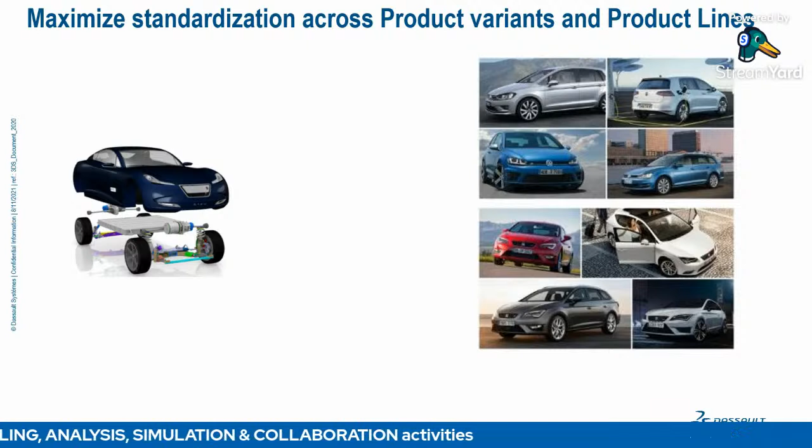So the main focus for today is how we can maximize our profit. Maximizing our profit as a product maker, doesn't matter if it's in automobile industries, high tech industries, or even oil and gas industries. We want to maximize the standardization across our product variants or product lines, so that whenever a new product comes out, less variability happens and we can maintain our quality, and at the same time maximize our profit.

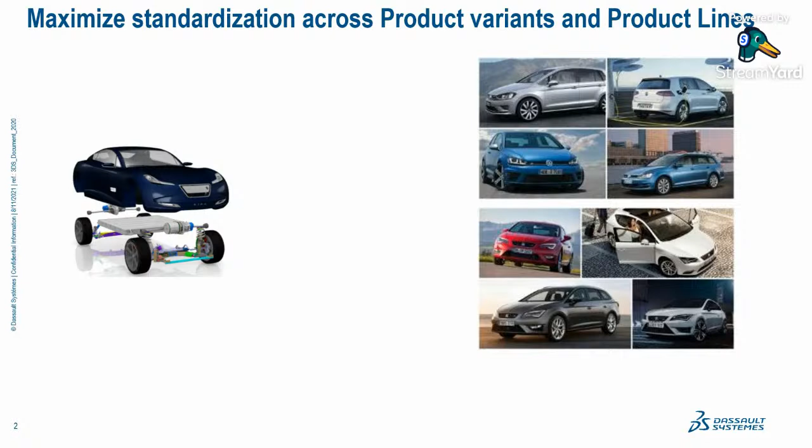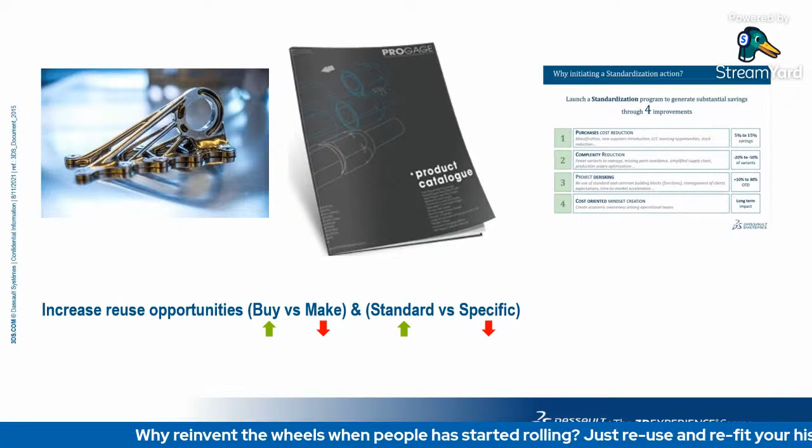So if we talk about standardization, there are four substantial savings we can have by using standardization: we can reduce our purchase cost, reduce product complexity, and reduce the project risk. And all our product design decisions are based on a cost-oriented approach. So how the 3D Experience helps is that it helps the company or organization decide whether they want to buy, make, or use a standard part, or create a new specific part for each product.

So here are three main components that I want to talk about today, about how 3D Experience can help: the reuse of standard components, and template management.

Component preparation and standardization: we want to design components against company good practice. We want to source the component from the value network. We are talking here about standard parts like screws, bolts, nuts, standard motors, and all that.

Then we go to component classification, management and optimization. Here we manage the company's ontology with required taxonomies to serve all stakeholders, and audit and monitor classified content to improve our component quality and relevancy. So here we are creating a classification system to manage our library and catalog so that it's easier to use for the whole company.

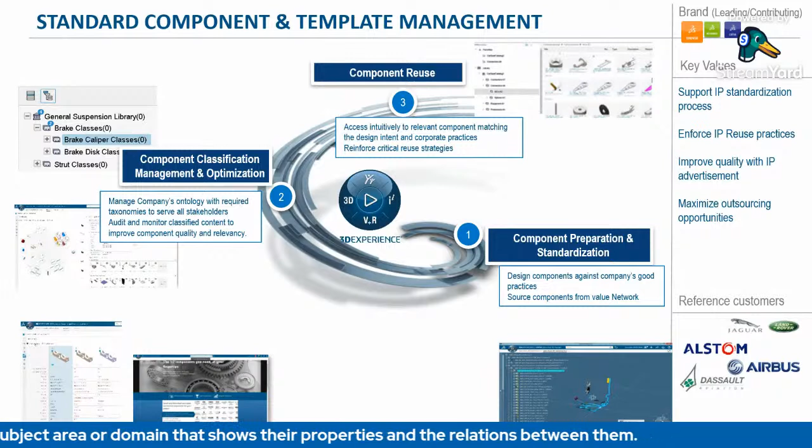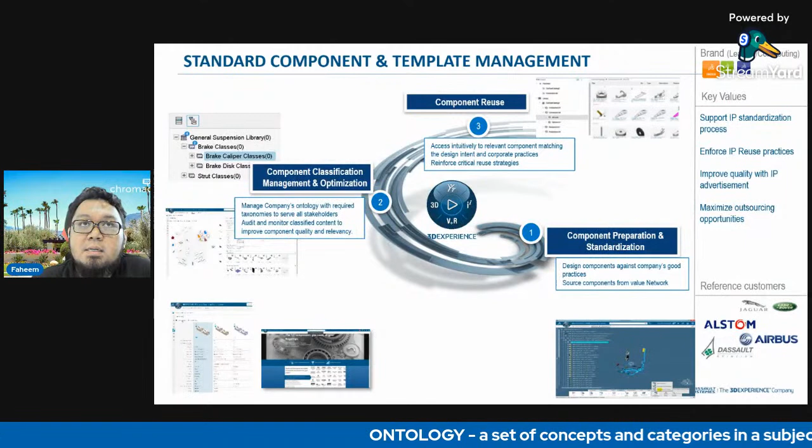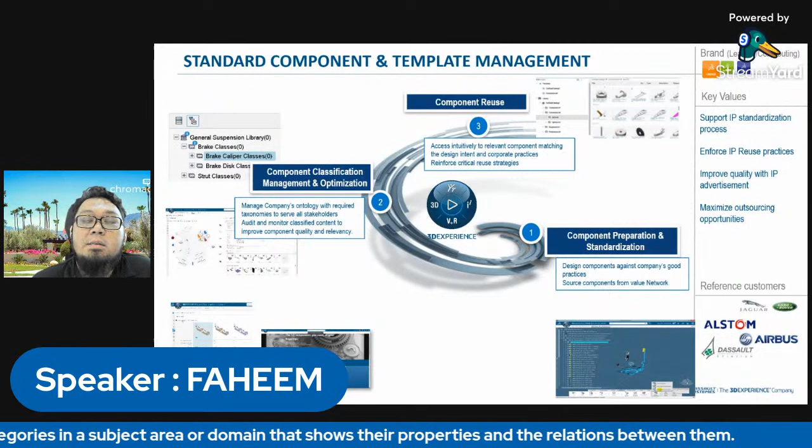And then finally, component reuse. Here we want to access intuitively relevant components matching the design intent and corporate practice. We are talking about specific parts that we can reuse from previous designs or products which are the best match, so we can reduce the cost of R&D, or reduce the cost of production by identifying which suppliers are good for these particular parts.

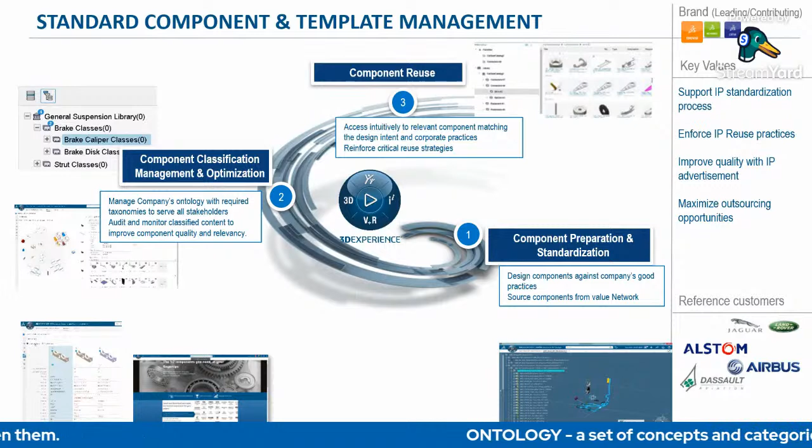So let's go to the first one, the component preparation and standardization. I will play a short video, just a brief video on what is a part supply.

For 3D sourcing, we have two base places in 3D Experience. There's a 3D Experience marketplace where we can source for a supplier. It has over 1,000 suppliers around the world. We can source for standard parts, and I think over 40 million parts are available.

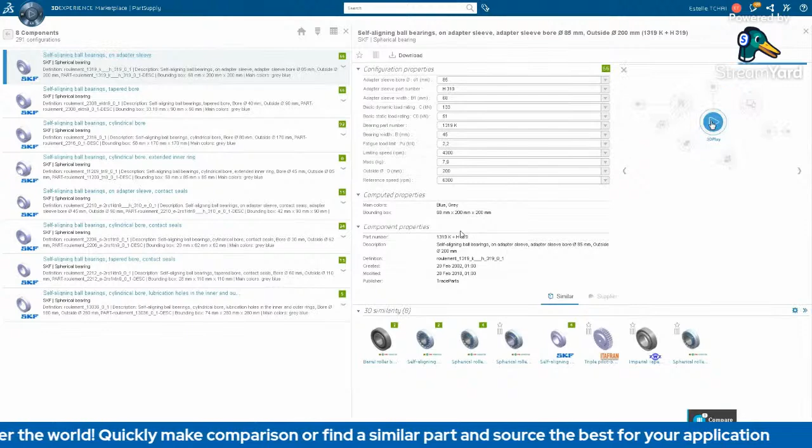So we can have a tag here. We can tag by certain product, or we can tag by a supplier category, what kind of category. Here we can see the 3D part, the specification, the stress part, the functional part, or the mechanical properties, or even the drawings of these. And we can even make a comparison of what's available.

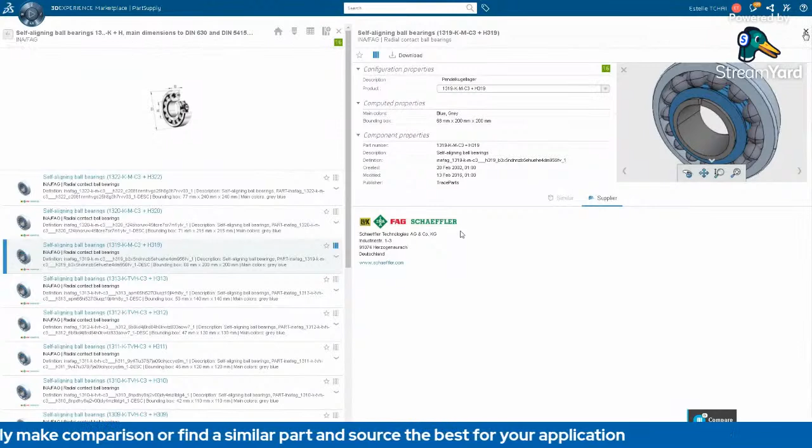This is a comparison of different suppliers of a standard part. For example, here is a bearing. We can see which supplier provides this and how much it costs. So here also we can see that this particular bearing has a lot in common between the different suppliers.

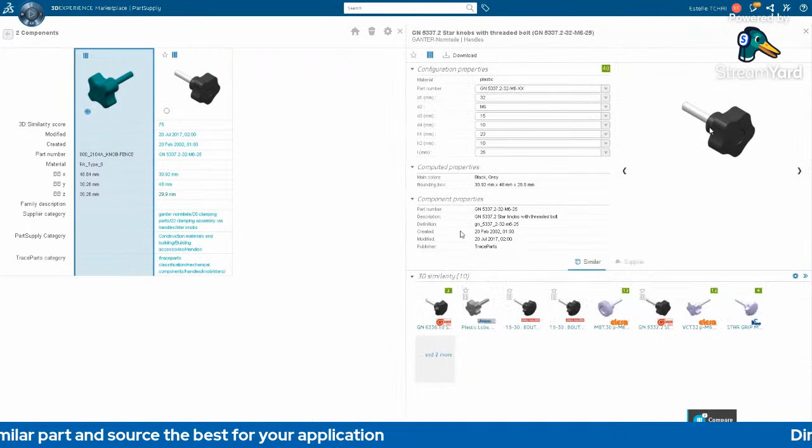We can test our file here. This is from Catia. We want to look for any part with similar geometry. We can insert our geometry into the experience, our part, and it will search for standard parts that have a similar geometry. For example, this particular knob has a few similar suppliers with 3D similarity.

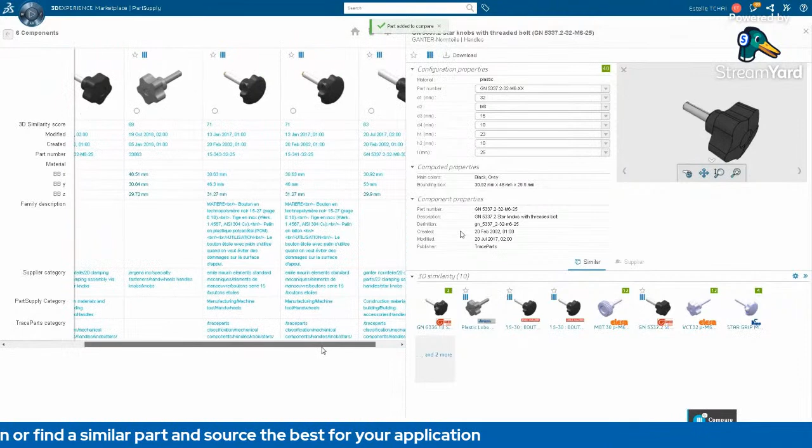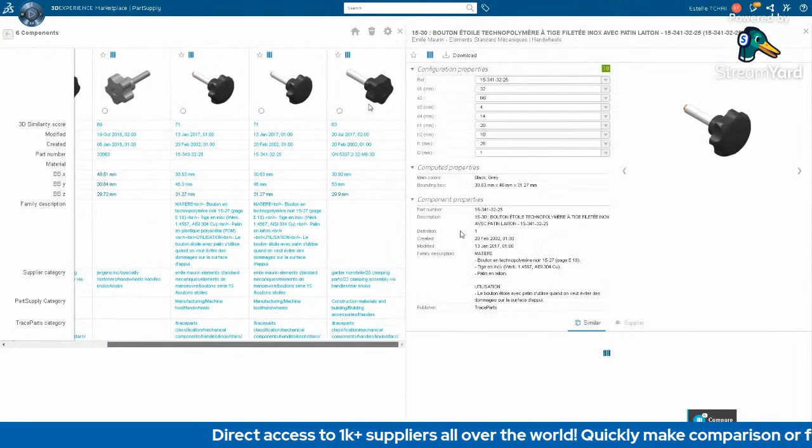In this case, if we don't have any particular search word, we can even use a 3D part. So 3D Experience will look for the similarity in the 3D itself. We can use Catia V5, step file, or SolidWorks. That's a brief introduction.

Basically, the 3D Experience marketplace connects between the designers and the sellers, the suppliers, industrial service providers. Even from the designer perspective, we start to connect between the designer and the supplier. We don't have to go through the whole process until purchasing and then go back to the designer, back and forth. Here we can connect directly all the designers, the design and manufacturing engineers, directly to the supplier.

You can explore this and create a free account on 3D Experience. Then you can open PartSupply at partsupply.3dexperience.3ds.com and make.3dexperience.3ds.com. The make one is for a 3D printing marketplace, so if you have anything to 3D print, you can source it all around the world. As mentioned before, we have over 1,000 content providers with over 40 million plus mechanical components.

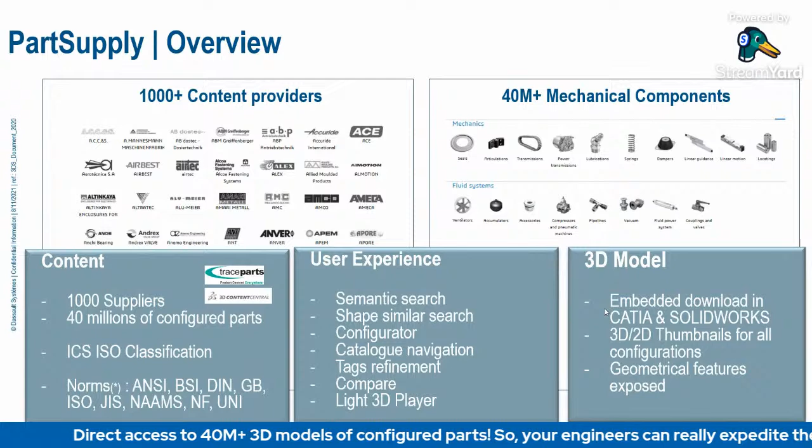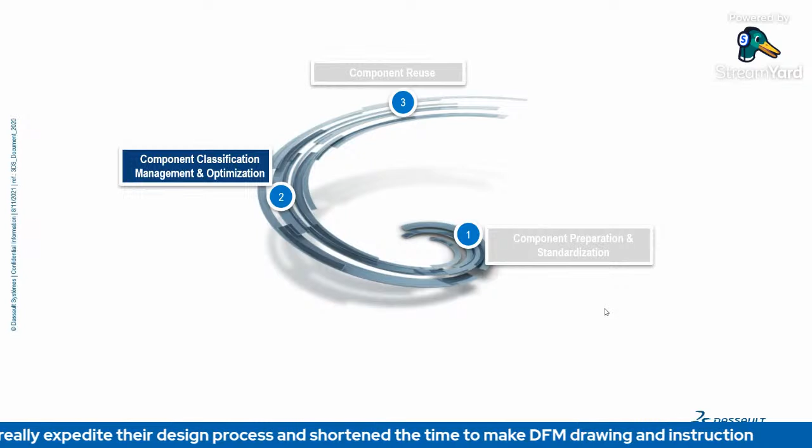Next, we will go to component classification, management, and optimization — basically how we can help manage your libraries, your company libraries, and ease the process of standardization and reuse by using 3D Experience. We'll look first at a short video.

As a classification manager, what we are trying to do is show how we can help create a library for a company, and how easily you can create your own classification, your own library, by using 3D Experience. The GUI already helps if we want to create subclasses, classes, or rectify, and even create classes based on a certain attribute.

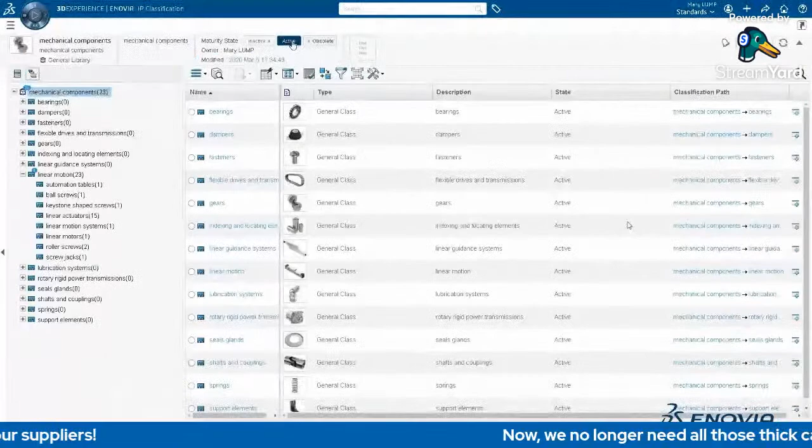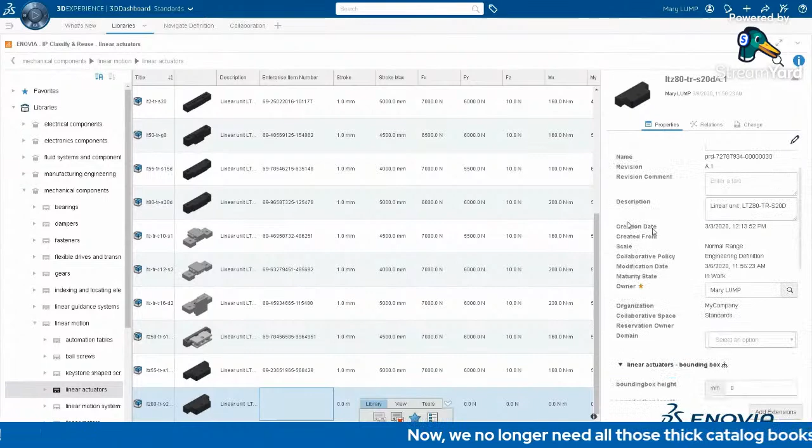Here we can create attributes that are very specialized in some parts, and this will help our designers easily find their products later in the design process. If we look here, everything has been classified accordingly, and we can specify each parameter so that it is easier for the designer to search for this part.

Here, as a designer, when he wants to find a particular part, he can navigate easily just using an attribute. Let's say FX over 6600, and all the parts that have that attribute can easily be found.

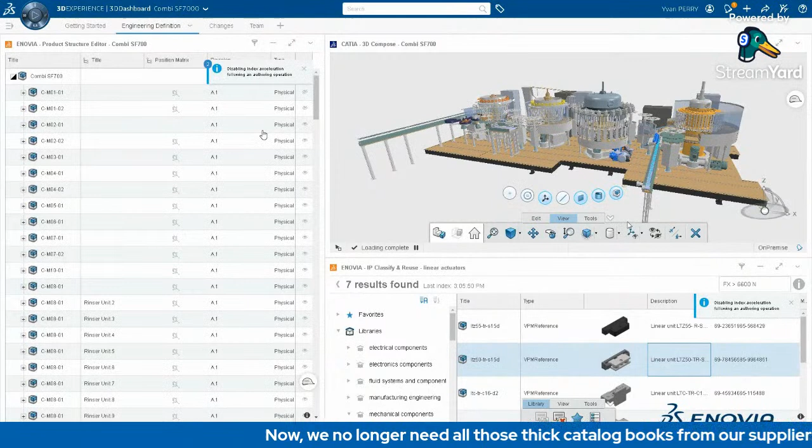In addition to attaching information to engineering data, other roles in the organization also require the ability to view product data through their own role-based classification. Most reuse catalogs have a single monolithic classification taxonomy that defines the organization of all product data, so all roles that need the data must access it through the same classification hierarchy. Usually this hierarchy is defined for the role that makes the most use of the data, typically the product design function. But to be effective, the product development process needs to share information efficiently across all disciplines.

Engineering, supplier management, marketing, legal, all related roles need to be able to collaborate and combine the resulting product information into a single source of truth.

So the classification organization that makes sense for the product design may not be intuitive for other roles. Marketing or a supply manager may not have a good sense of engineering classes and may not be able to easily browse through or search in this organization.

So in order to efficiently collaborate in the product definition process, in order to find and use material for their own task,

other groups require classification taxonomies and attributes that are specific for their roles. You would have a different classification for each role.

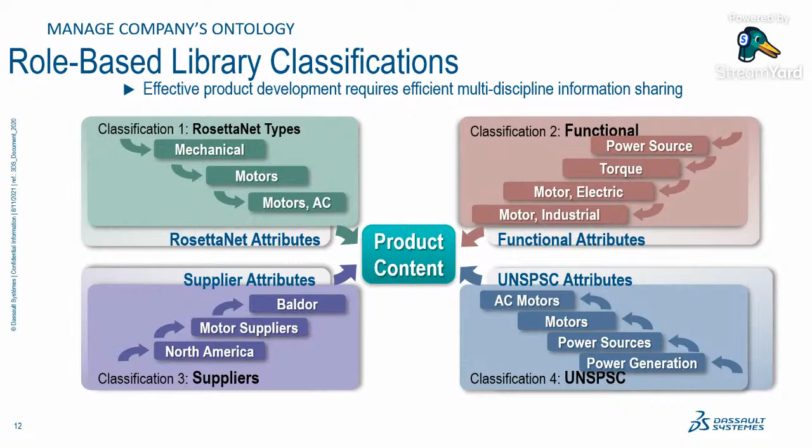So here, 3D Experience Library Central, we call it, provides a different approach. It provides the ability to have multiple classifications that simultaneously classify the same end items.

So each role can view the product data through its own library with its own classification. Each library has its own attributes that are inherited based on where the object is in the taxonomy.

Each taxonomy can be browsed and searched within its own role-specific definition.

So this makes it very easy for each role to find and use the data within a single source of truth.

So if there is a catalog in place, consider how the data in the catalog is organized. Some catalogs are simply a single large collection of reusable material.

Perhaps it is as simple as sorting by alphabetical order. So the simple catalog does not provide sufficient data to search for and identify a target component.

So frequently, one or more components would need to be retrieved and analyzed in order to make a reuse decision. Even in some cases, they need to be inserted into the design and tested in order to decide if it fits.

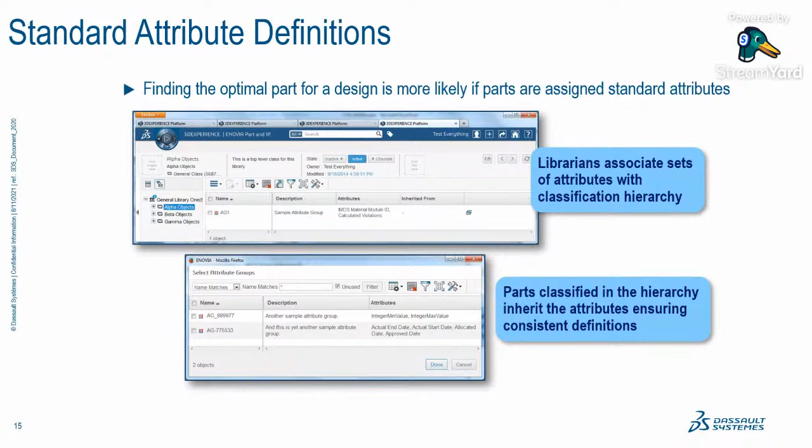Because the maintenance effort is low, the systems are flexible and easily defined. Here we can see the dynamic attributes directly on the classified item listing. So when an item like a part or document is classified under a class, it inherits attributes from the attribute group associated with that class. A user may view this inherited attribute in the classified item category listing.

Another topic I want to touch on is document retention. The retention and deletion of documents per prescribed corporate policy is a normal part of business. It impacts the cost of doing business by controlling the proper level of resources dedicated to storing business documents, and it affects the legal exposure presented by holding this information, including potentially damaging information or information that would exonerate a company.

A retention record object defines how long a document should be kept after it becomes obsolete. All the associated documents for that product also become obsolete. The retention record defines the length of time to keep a document before it can be purged. Purge does not mean delete the document; purging the record means the database can be purged, but the document can still be referenced as needed.

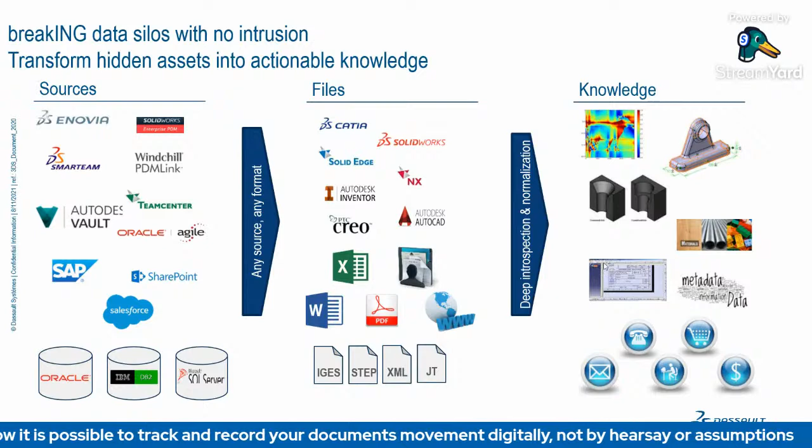The file type is not limited to 3D; it can be PDF, Word, website, IGES, STEP, XML, or JT. So it can be any type of file, and it can also be any kind of knowledge, whether analysis knowledge, metadata, a drawing, any range of knowledge.

And then finally we come to component reuse - how we can reuse our components. Here we have what's called OnePart reuse, which has three clear steps: we identify, we cluster, and we select. We identify similar parts based on 3D shape, geometrical features like holes, and semantic criteria.

It's all using AI and machine learning, and we can even classify the data depending on the role perspective, whether according to company policy, cost, assembly, or certain items. And then finally we select which one to publish to the engineering department.

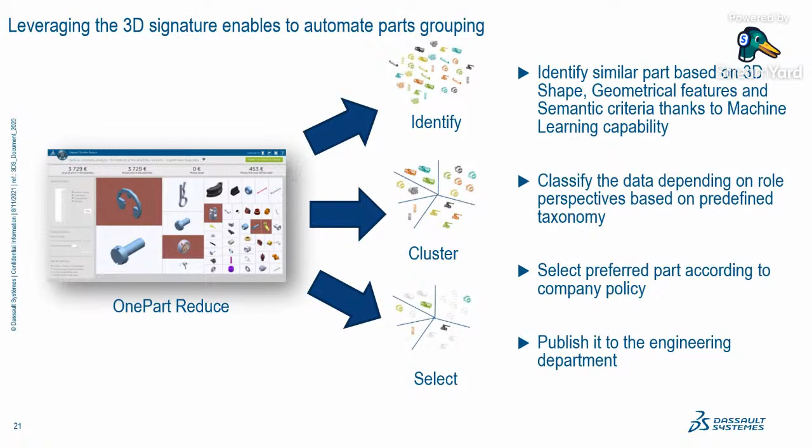So we use the company standardization strategy. The source for one part use can be from PDM, PLM, ERP, CRM, or any database like SAP or Oracle. Then we go and create one single source of truth, and from there we can analyze all information related to a single part and decide whether we want to reuse it or make a new one.

The advantage here is a one-click search. You can search based on shape, functional similarity, or things like holes and number of holes. So we can use the company's preferred parts, and we can also insert it directly into the session to see whether it fits or not.

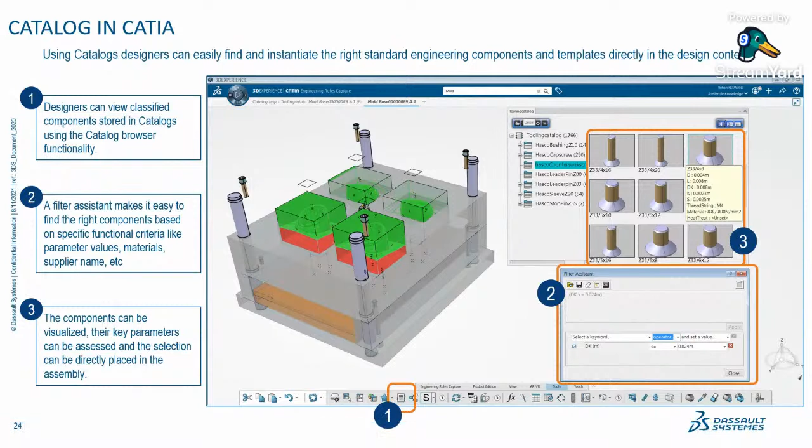Here as an example, this is the Catia catalog. Using the catalog, designers can easily find and use the right standard. The designer can view classified components stored in the catalog, then filter based on certain attributes or specifications, and the component can be visualized with its key parameters.

So for the last part, I will be showing a demo video for the reuse capability and the overall cycle for the reuse activity.

I'll play a demo video to show the whole cycle in the reuse activity. So here I am logging in as a part designer, and I'm doing a search and discover.

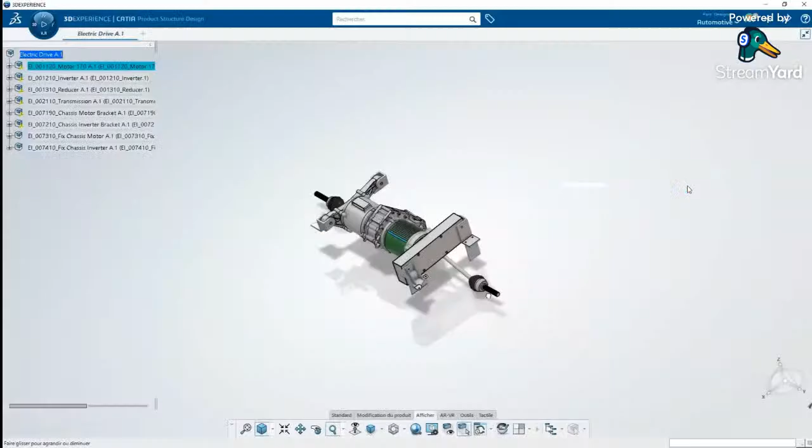Here in this particular electric drive, a motor electric drive, I have a general raw part - I just made a raw box with very specific holes, so we can see if I can find any similarity using what we call OnePart, which is the function of looking for similarity in the 3DEXPERIENCE. If I look through that, I can see some components that have a similar shape, but they're not relevant to me - it's just a box, any box we have in our library.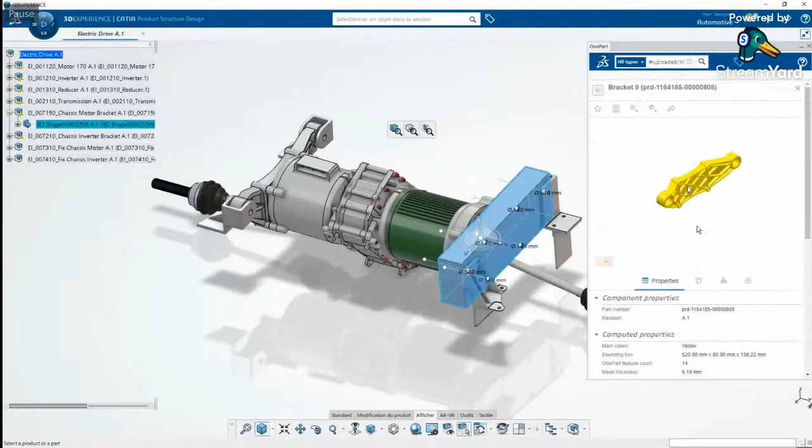But if we search based on particular geometrical features, like hole position and hole components, then we can see that there are some parts that are relevant to me for this design. So I can insert it and see directly in the session whether the part fits the product itself. And I can see that it fits.

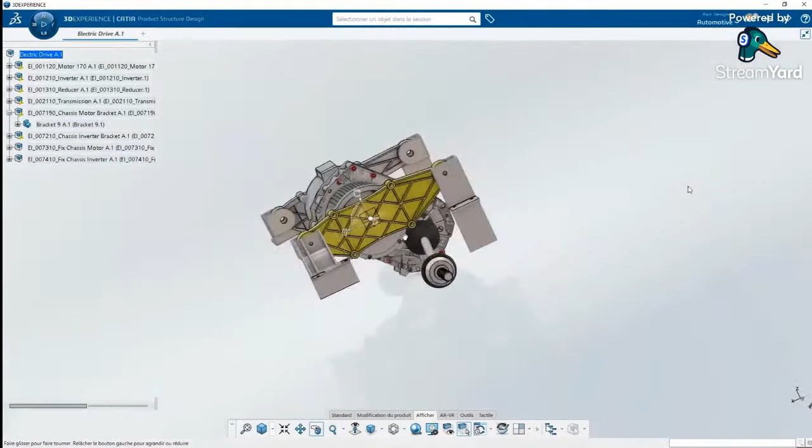So maybe I can use this part. But what makes it more powerful is we can use this - I open the 3D dashboard here, isolate one part, and from there I can open it and see a 360 view of this particular part.

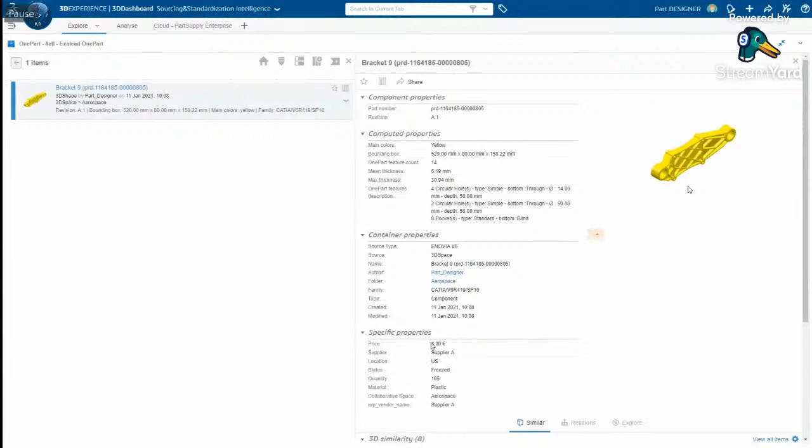I can even access the properties, the size, where it is used, and when it is used - even the ERP sources, the part price, the supplier, and the location, all in this 360 view.

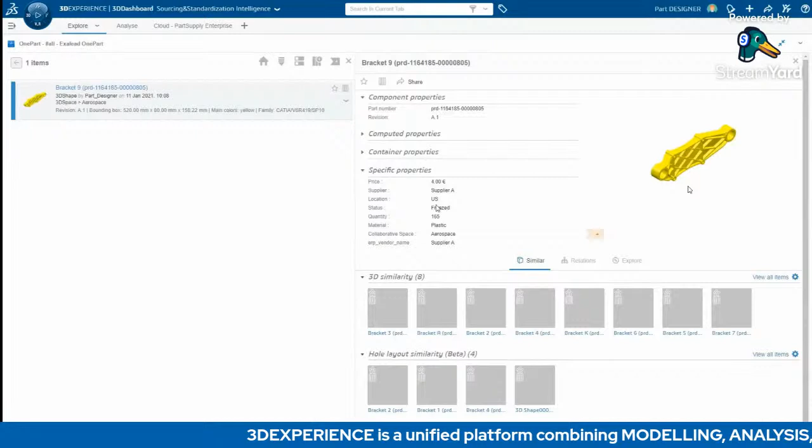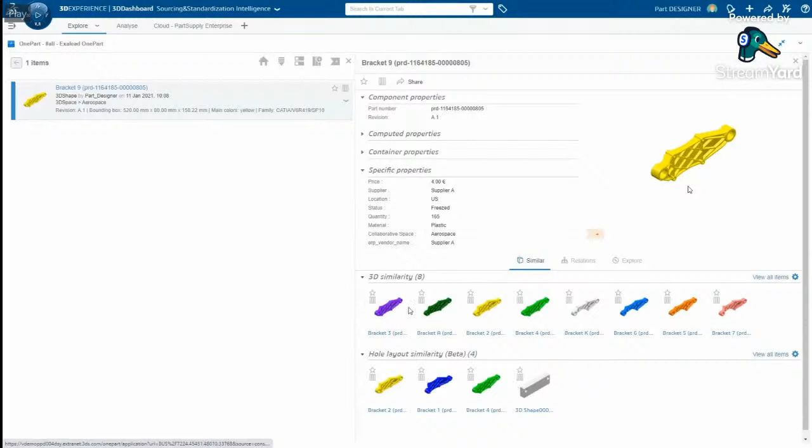So here also we can see some similarity and relation. What is the parent of this product? What are the related parts to this parent product? And also here we can see some parts with some 3D similarity and parts with similar hole layout. So we can use this criteria to search which component we need to use.

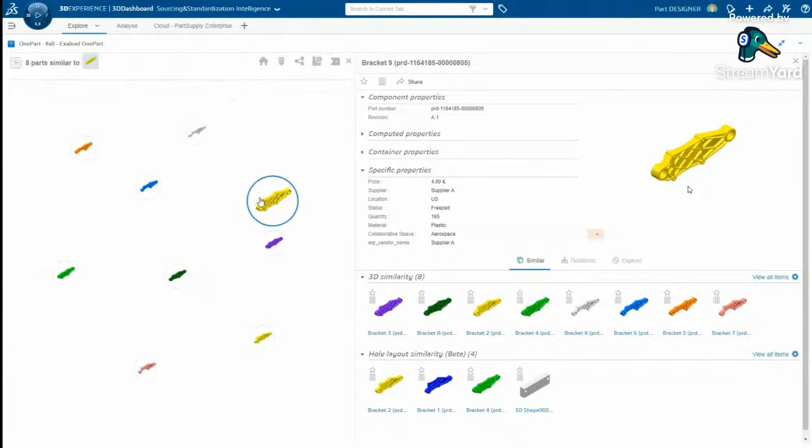And if I see all the items with 3D similarity here, I can look at it using a table view for easier understanding of the data, or even I can use a graphical view for a better feel of what is there in the database. And finally, I can compare all these parts that are similar. We can see in this comparison table which parts are similar and what is the advantage of certain parts compared to others.

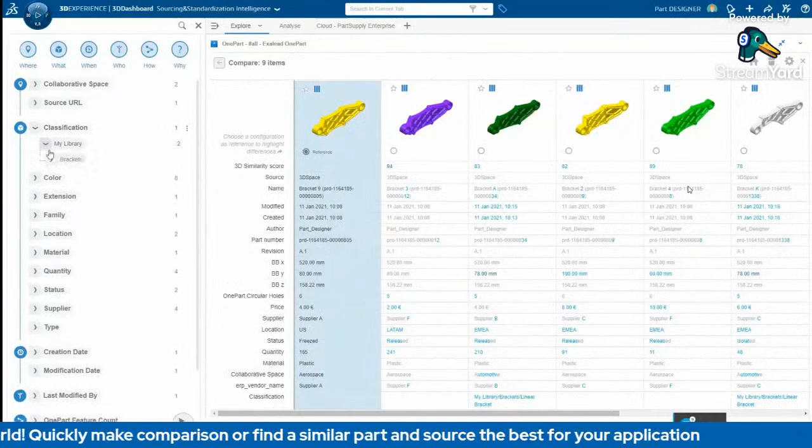But then when I look at the classification of this bracket 9, it is a linear bracket. But when I look at my IP classify and reuse ENOVIA app for a linear bracket here, I can see there are only two parts defined in the linear bracket. But the one I searched before, there are over like 7, 9, I think 10 parts here. So what I want to do here, I need to create a task for a standard part manager, because there are only two available.

So I want to ask him whether we can add all these parts into linear bracket. And now I am logging in as a standard part manager. We are going to do a cross-program standardization.

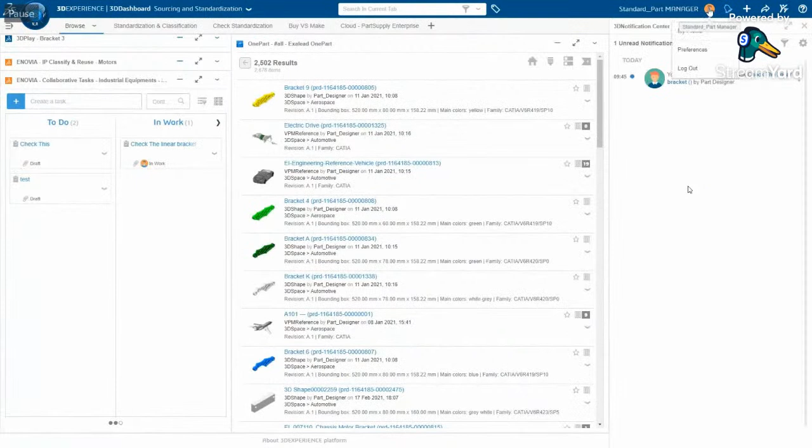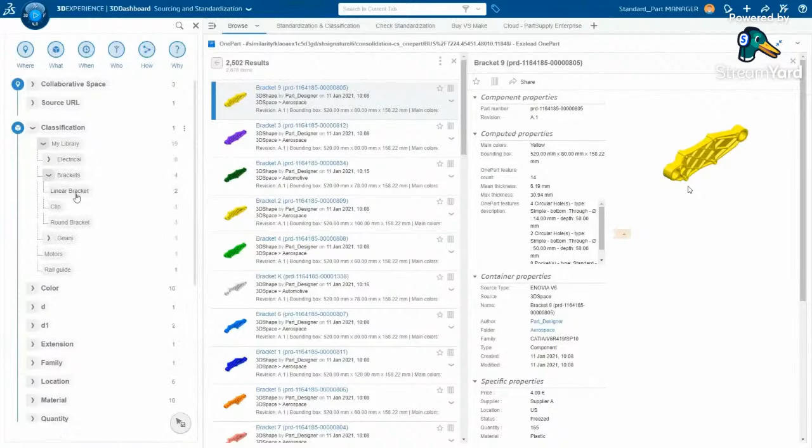I have just received a task. If you see previously, I received a task from a part designer, and then as a standard part manager, when I look at this task, I see the similarity also. It directly contextualizes what is similar, and when I look at the bracket in the linear bracket, yes, there are only two available, but I can see much more here.

So what I'm doing here is that I want to create a universe. When I create a universe, like a standard for civil universe, we define the scope, and then we can create the similarity ratio, like 20% here, and we want to go through my specific library, only search within my specific library.

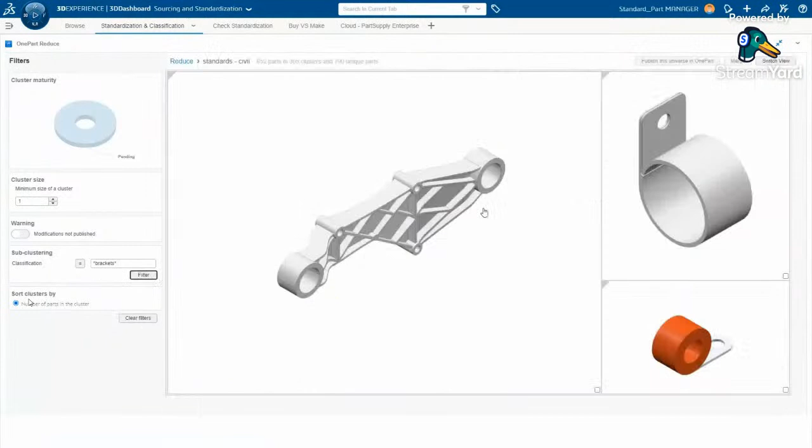So we have this many potential part standards, and if you see in the gray corner here, it is the part where it is relevant, and if I filter it by bracket, I can see there are 3 parts relevant to a bracket. So if I look at bracket here, I go to a linear bracket.

So I could see there are many parts that are similar, 7 you can see, and I can see this orange part here. This is in another similar cluster. So there is a cluster for that part, for the orange part, and there are 2 parts also in that cluster, in the pink part.

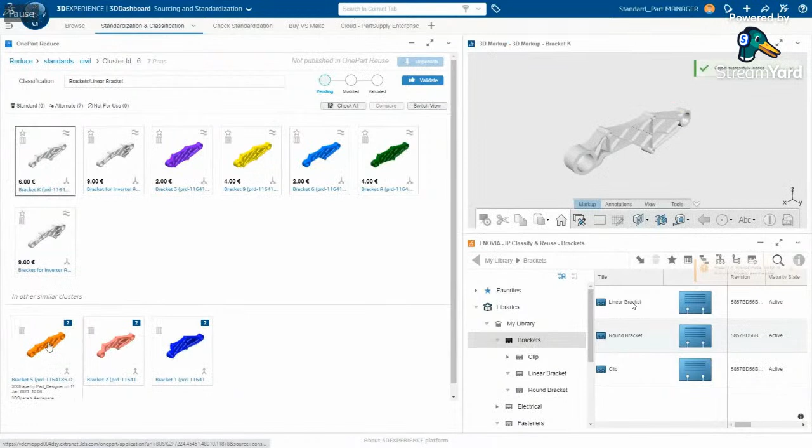So what I can do here, I can use a 3D markup to compare those parts in the different clusters, whether it is the same. So we can see here actually, so the hole position is correct, it is the same within, even though it is a different cluster, it is the same hole position, so it can be used.

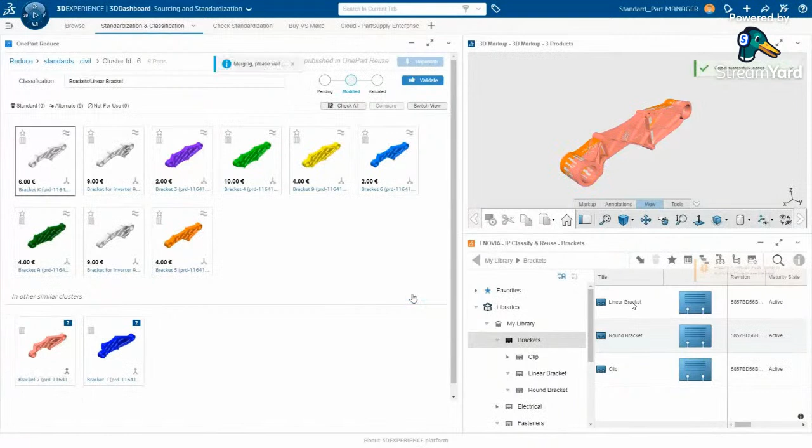And I'm checking this pink part here, whether it is the same, so I merge those clusters into one single cluster. So right now, if we go to my linear bracket, after I publish it, I can see that these two libraries here are helping to define which classification it needs to be, and then you can see the comparison. So we can see the numbers have grown up.

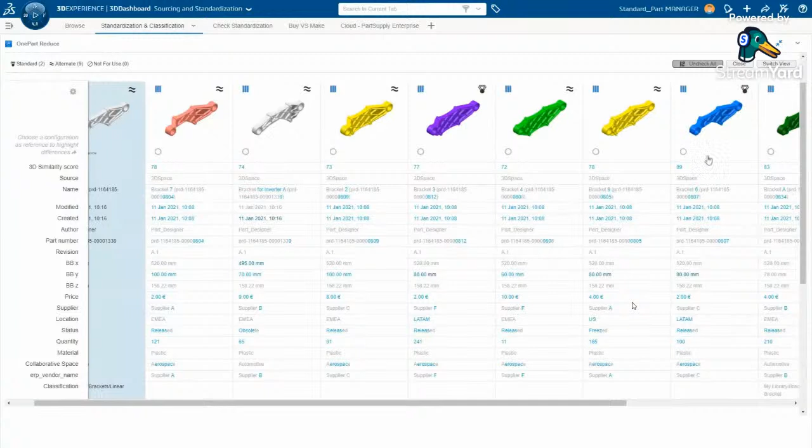So I'm selecting this basically based on which are cheaper. And let's say here I want to put something cheaper, and I also want to put something that should not be used. So here I'm selecting the pink part that should not be used for this particular project, for this particular universe, we call it.

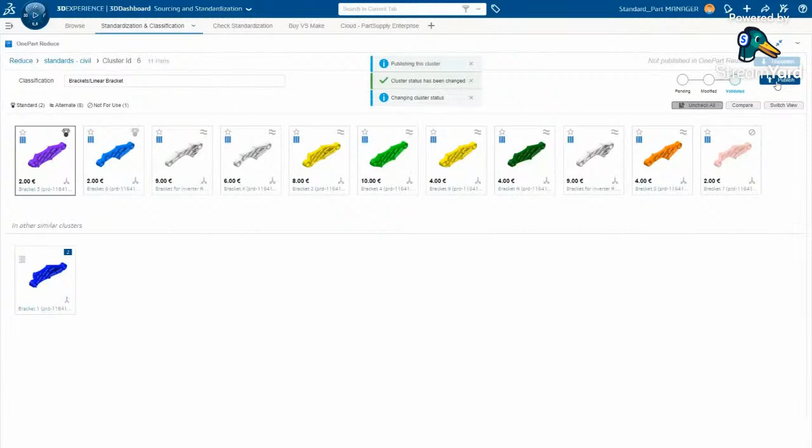So I publish this. So when I publish this, it is actually being published so that people can search it using a linear bracket. So if you see here right now, the linear bracket classification has more parts in it.

Next, what I want to do here is give an example. If I look into gear, I already know it is a gear. I just need to search for gears per classification. So I can see there are few similar items. Even here for this particular product, I can say not to use this particular product, but it doesn't even have any classification. And we just validate and publish it.

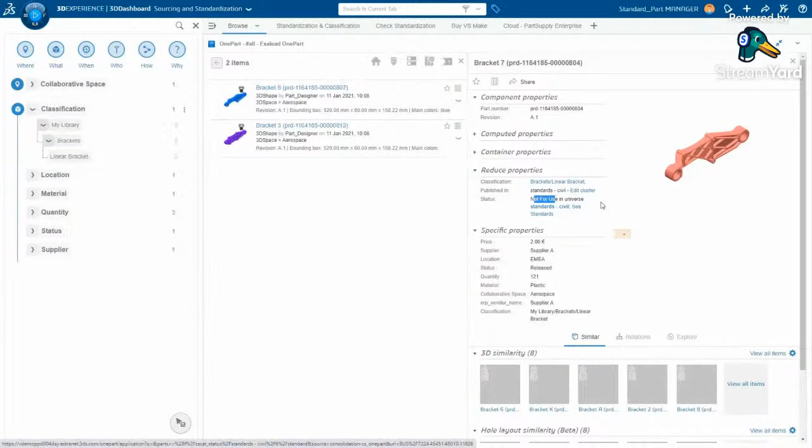Let's say in the military, we define the scope, and searching for any aerospace part, create the scope with a 5% similarity. And here we can see that it has these other two champion. But then I make this purple part not for use for this military universe.

So if you can see, in the universe for the standard, but not for use in the military. And then I make it as completed for that task.

So right now I'm still logging in as a standard part manager, but what I want to do is a standardization check on the assembly. So how will this part fit on an assembly? So I create another universe, but this one is specific for assembly analysis.

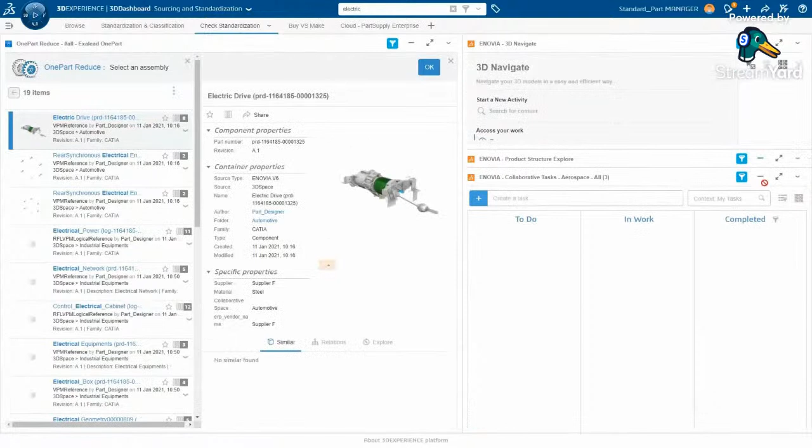So we want to do a check motor for civil program. We define the scope here. So we search for this electric drive, our electric drive. And we look through all the parts available here in the assembly.

And we can see parts here that are available for the assembly. So we select from our standard civil, from what we have defined before. And we run.

And we check there is 45 parts in the assembly. And there is 42 parts that may have been replaced. And 240 euro may still be saved. And 93 parts in the universe scope.

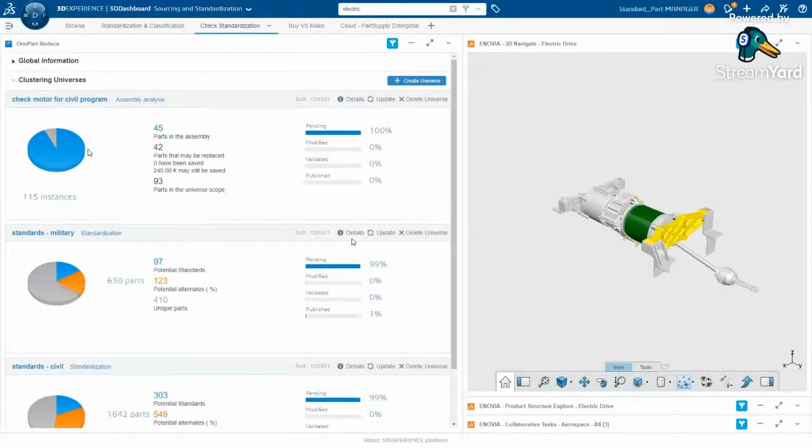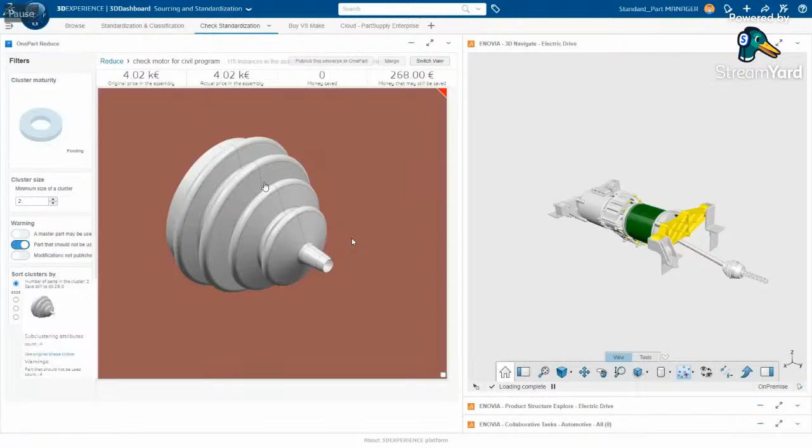So we will look through this. And here we can see all the parts in the assembly, and those in red are the parts that we can take our focus on more. So because for this part, it is a part that should not be used, as we defined before.

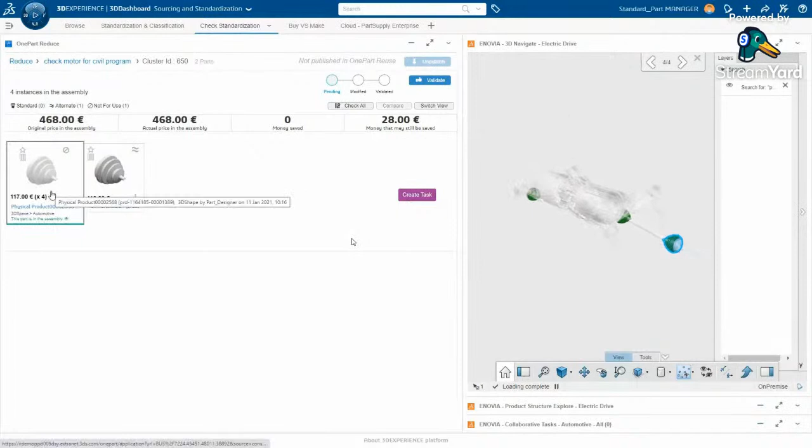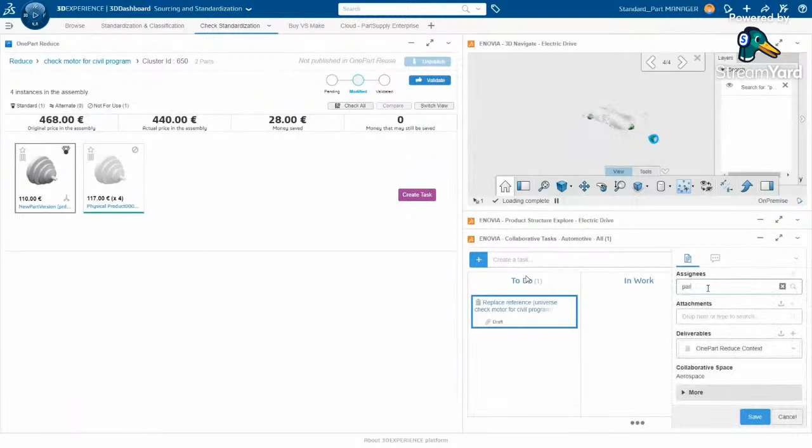So it is part in the assembly, but it should not be used. So what we can do is, if we click that part, we can see in which position are those parts in the assembly. So I found another alternative for that part, and I create the task for our part designer to check whether we can use this other different part, because the part that's already there is defined as cannot be used.

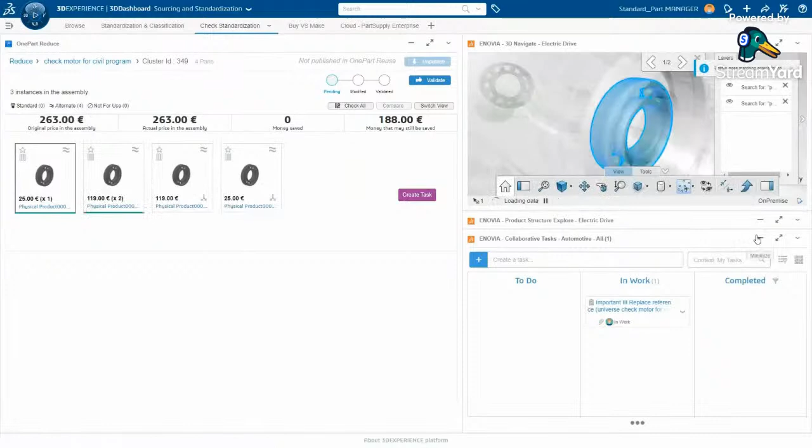Another thing is that there's a tag here where I say the money that can still be saved. So for example here, the most money that we can save is for this bearing here. So here, if I see, this is the part that is currently in the assembly. The price is 119. But if we select the cheapest part, the 25 euro, we can save 188 euro. So I'm creating a task for a part designer to check whether we can opt for this cheaper part.

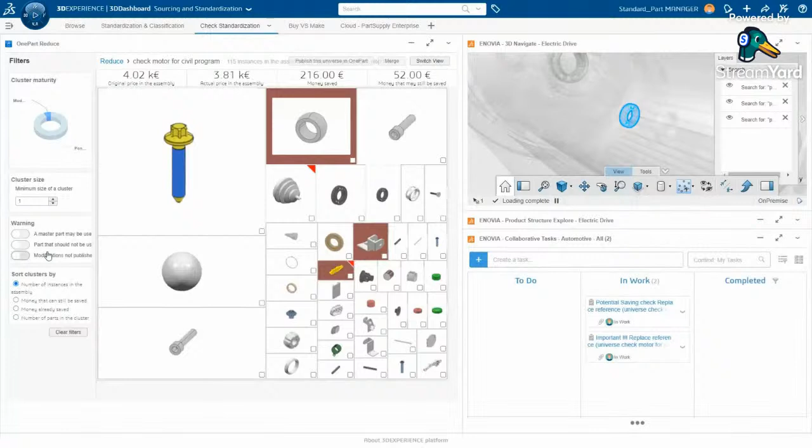So here we are looking at the master part alternative. So here we see that there are some cheaper options for this part. As you can see, the purple and the blue are cheaper options. So I just create another task for a designer to check this, whether we can use this other two options.

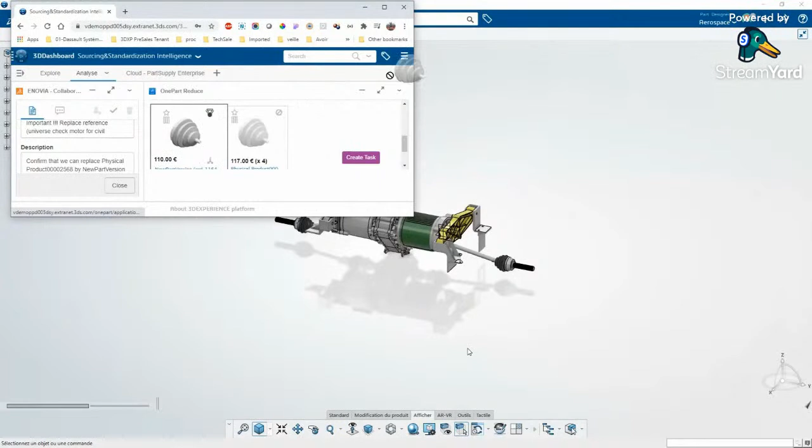Okay, right now I'm logging in as part designer for use standard in CATIA. So we have here, as a designer previously, three more tasks that have been assigned to us. We want to check between these two parts, whether the part that's suggested as champion can be used.

So I open this part, I insert it into this electrical drive. I replace, and then I will save this part and it will be updated. So you see there is no more highlighted in red.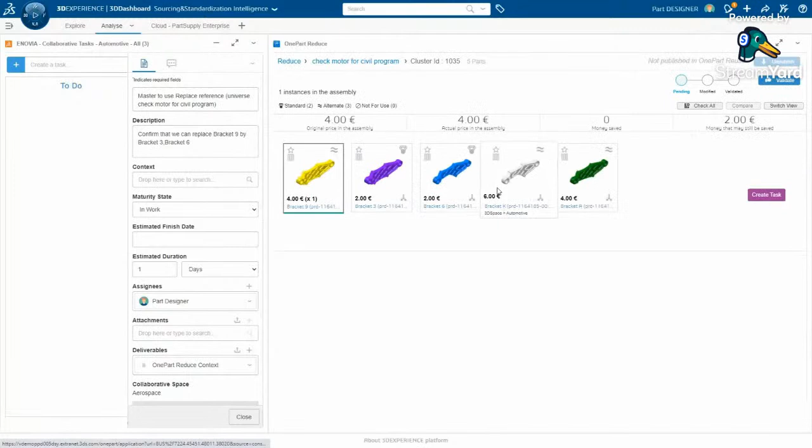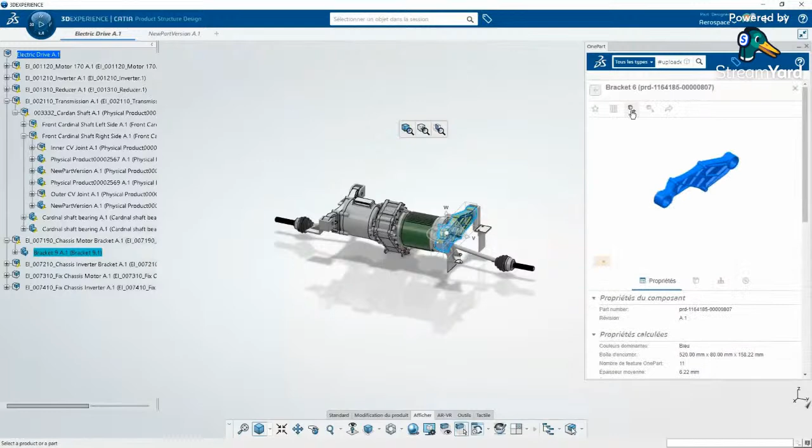And lastly, I go to, as a part designer, make a decision whether you want to buy or make a certain part. So here, the part that I'm looking for is the rod end bearing. We have a few suppliers that are available for this part, the rod end bearing.

We look for the part supply community, what's available in the market. Looking through what's available in Germany, we look from another supplier.

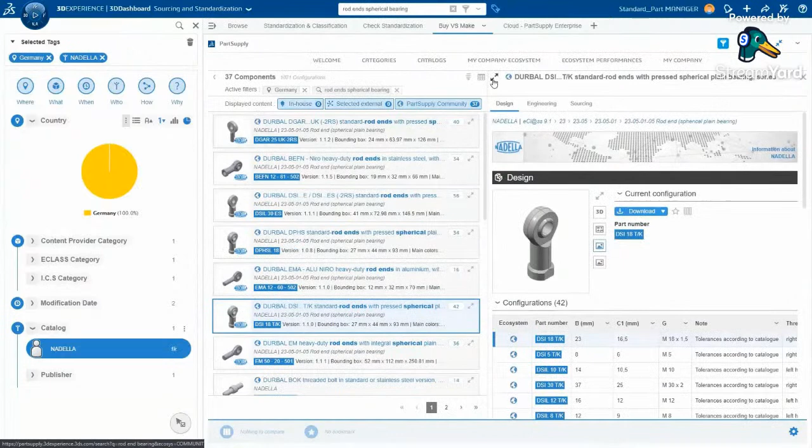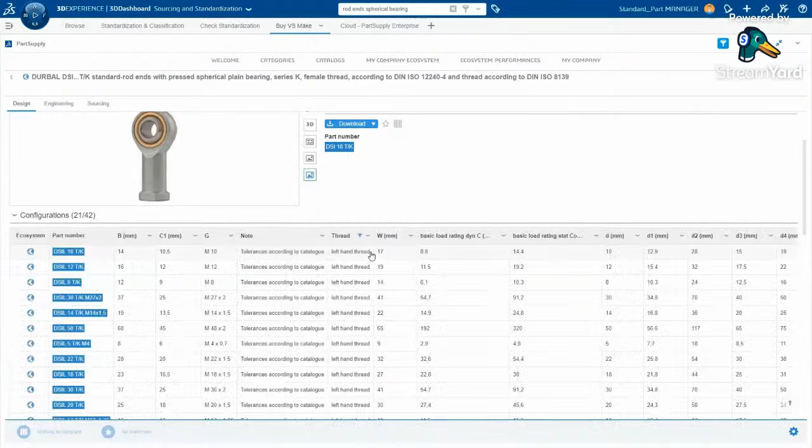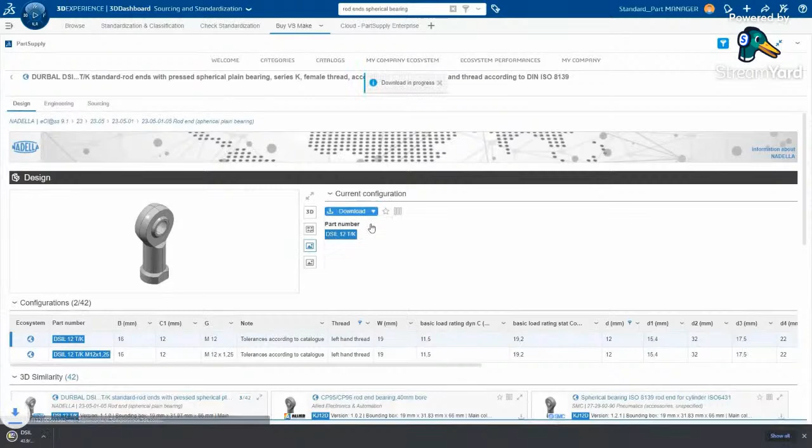So we can filter this by engineering attributes, which one you want to select. So after we agreed on some engineering spec, we'll take this one, and then I will download this part. Then I want to compare what is available in the company, and we can make our decision whether we want to buy or make.

And I think that's all from me. So I think I'll pass back. Wait, sorry, yeah sorry, this is the final slide.